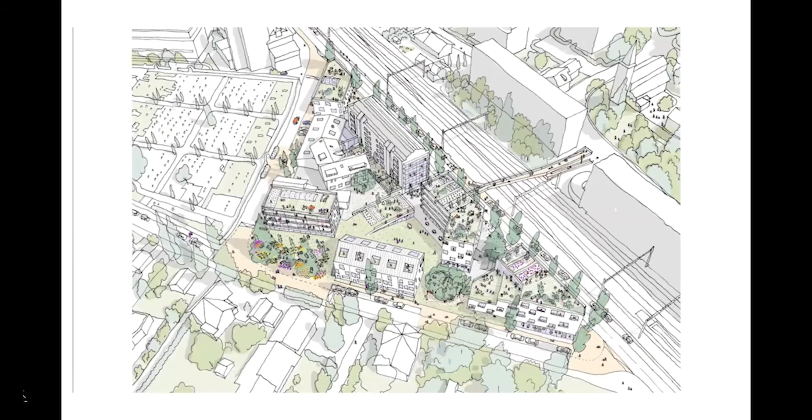Design United was created in March 2020 during a period of intense lockdown and quarantine measures within the region. The aim behind Design United was to create an optimistic space for regional dialogue, connections, collaborations, and opportunities for young regional designers and design practices—a much needed network of support and peer mentorship during these uncertain times. Talented young designers and design studios working on design innovation with an approach relevant to our South Asian region have been invited to be part of the platform.

With this background to Design United, let's move to the much anticipated presentation and conversation this evening. I'm Varna Shashidhar, founder principal of the regional landscape practice VSLA based in Bengaluru. I'm supported by my wonderful DU and VSLA team in this endeavor, along with Claywork Spaces. I'm delighted to welcome our inspiring presenting designers, architect Yanto Effendi from MODERNSPACE Jakarta, Indonesia, and architect Ajith Andagere from Magadi, India. Their presentation will be followed by a moderated discussion.

It's indeed a privilege to introduce our presenting designers. Yanto Effendi from MODERNSPACE Indonesia. Yanto's design philosophy focuses on the creation of modern architectural forms and spaces that are comfortable and livable. He believes that no two buildings can adopt the same design, as each project constitutes a specific response to its program and its site. He established MODERNSPACE, a multi-disciplinary, well-recognized architectural practice in Jakarta in 2002 with his partner, Hanny Lim. The firm's work spans a vast array of typologies, including residential, institutional, hospitality, offices, and retail environments. MODERNSPACE is well recognized in the region for its detailed material exploration, which they bring to every project that they undertake.

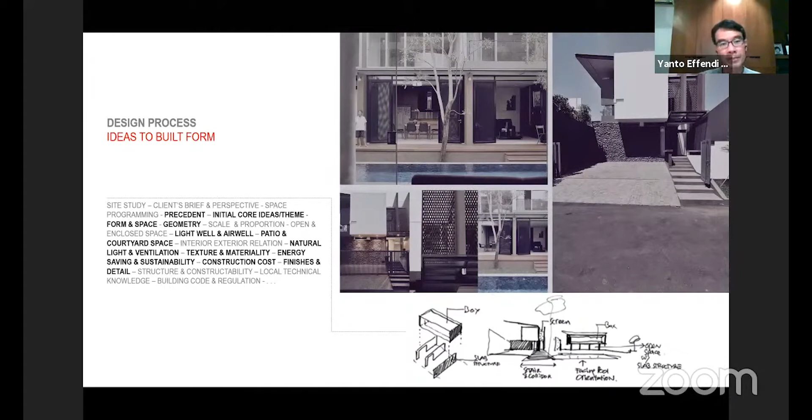Initial ideas, of course—on the first trial, the first time we get the appointment, we try to study the site, study what's the core problem of the site that we can resolve, and resolve it into a design language.

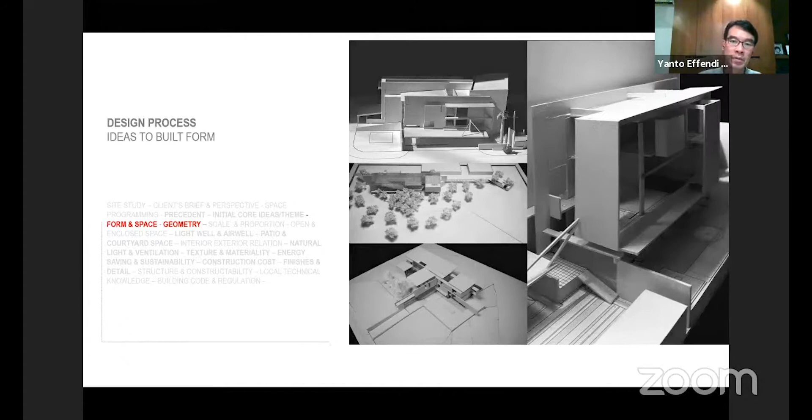We study the form and geometry through this process in our office—sometimes we do models just to study the forms. And then we do 3D studies also, from framework studies into basic renderings, just to see how the material, colors, and schemes work out together.

In each of our designs, we would love to have natural light and natural ventilation coming into all the sites. So every specific site that we receive, whether small or big, we always try to analyze the potential of the sun, natural sunlight, and natural air to come into our buildings.

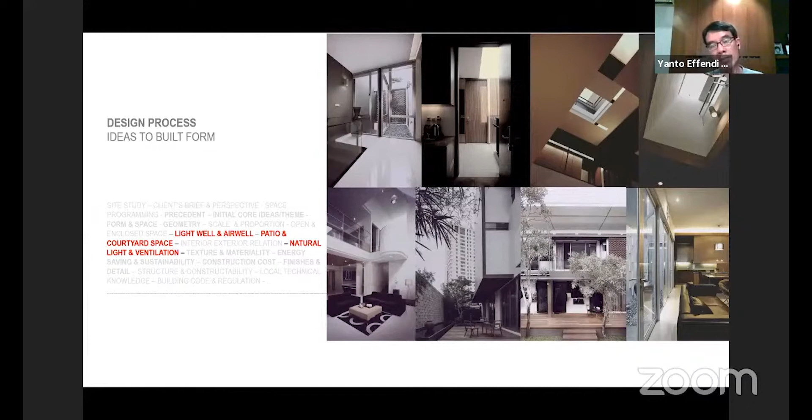When we try to do this, we know the effect is heat. So during this period, we would extensively study how, inside our space, to make the space a thermal comfort in order to get the most optimum light into the space, but also reduce the heat to prevent it and maintain thermal comfort inside our space.

The materiality we choose depends on the mood, depends on the program, depends on the specific mood we want to create in the space. The material and details themselves we create to solve each of the finishes that we have to collect into the space itself.

After the form and everything, the space is created. We also try to solve every detail of particular corners, particular joints, so that we have well thought out, precise details to solve every corner of the materials we use, so that everything works out well together by joining all the materials to create the space.

This is some material that we're using. We're using textures - smooth textures, rough textures - and then some of the character of the material itself to create the specific functions.

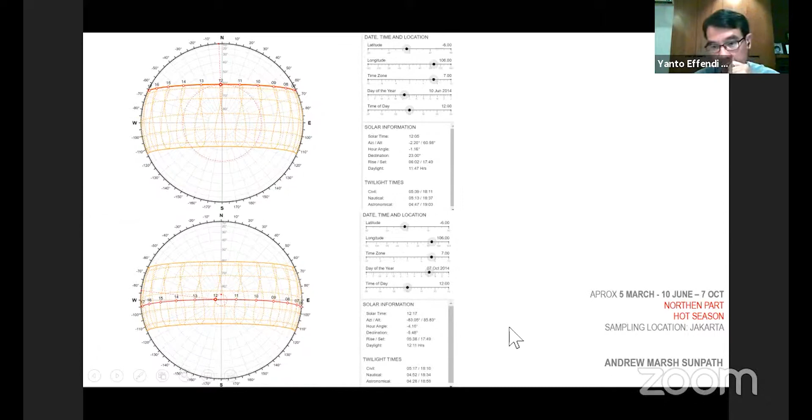Basically, most of our projects are in Indonesia. We like to use these schemes of sun path. In Indonesia particularly, we are in these regions, so the sun will be traveling from east to west, and during the one year time, the northern area will be lit up with a longer duration of sun, like a month longer than the southern area.

So the northern part will be hotter and longer during that period, and the southern part is happening during the rainy season. It starts shorter because the sun doesn't radiate as much due to the shading of the clouds during the rainy season.

So that's all the introduction of our brief projects that we're doing. I wanted to present 3 projects, which I felt are like a milestone for us to study specific use of materials and specific solving of problems.

Like in this house particularly, the project happened around 2012. So we have this kind of project where one area is facing west sun. During that west sun period, from 12 o'clock until 4 o'clock, there will be heat transferring into the space.

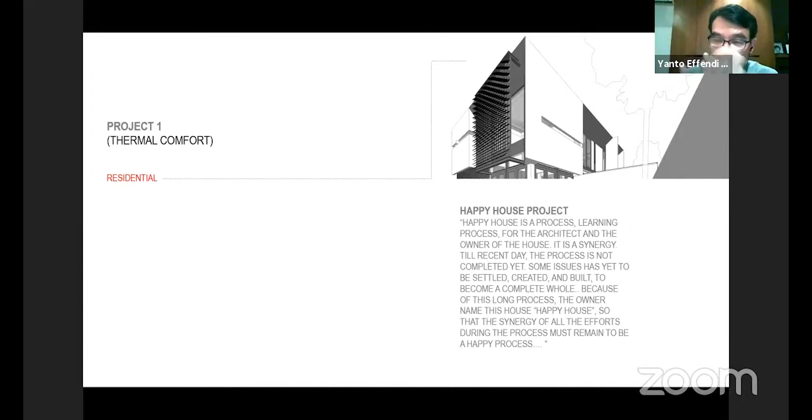This particular house is actually the one where we first tried to study how we can protect the glass that we want to open for view, so that this glass doesn't get heat from the sun. When it's not heated by the sun, hopefully the space inside will be cooler due to the protected materials. So we've done some analysis for this house.

So normally the massing that we're doing, we would like to break it into a smaller part, so that this smaller part can contribute when we open two sides, the air will flow quite okay. The character of the wind also depends on the openings, the big and small openings, and this affects the wind to create a wind tunnel and breeze inside the house. So with this big massing, we cut the area so it will be shorter, and hopefully the breeze will come in.

So we divide the private and public areas, and as a diagram we try to segregate them. These are the schematics we studied for the wind. This area is the west facing side, so we try to treat this area so it can protect the spaces behind from the heat.

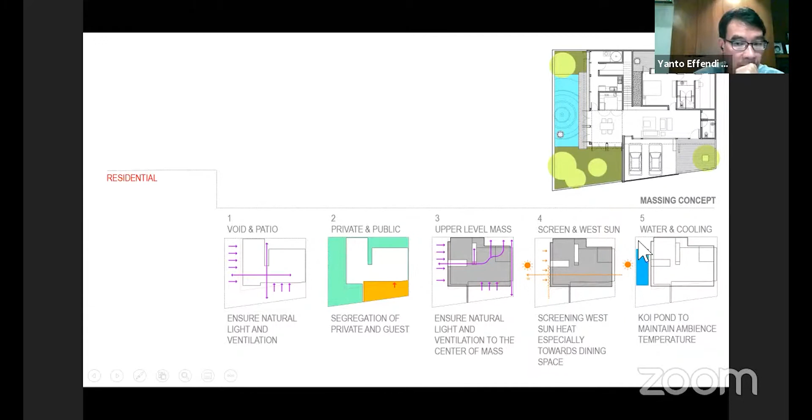So we do some sunscreens here, and since the owner has a hobby of keeping a fish pond, they wanted a koi pond, so we put it on the west side also, just to allow the air to evaporate from the pool itself to cool. It's like passive cooling for the space. When the breeze comes in, it can blow in the evaporated water vapor.

So in this particular house, we try to study the screen. Firstly, in our earlier design, we tried to use a screen made of timber. But when we went forward with the project, we felt the heaviness of the outdoor timber and the thickness required meant it wasn't bendable and was quite heavy. So we tried to find another alternative.

Then at one time I was looking at a pool chair using synthetic rattan weavings. When you sit on that chair during the day, you won't feel hot. So I was thinking maybe this kind of isolator material could be used to screen the heat, so it's not transferring the heat into the first layer.

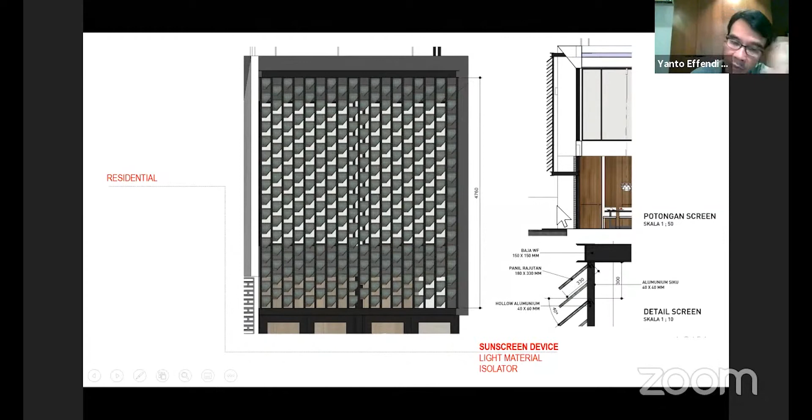So what we do is install the screen here, tilted at an angle that can protect against the hot sun until it reaches an angle where we allow the rays to come into the house, but by then the ray is no longer very hot.

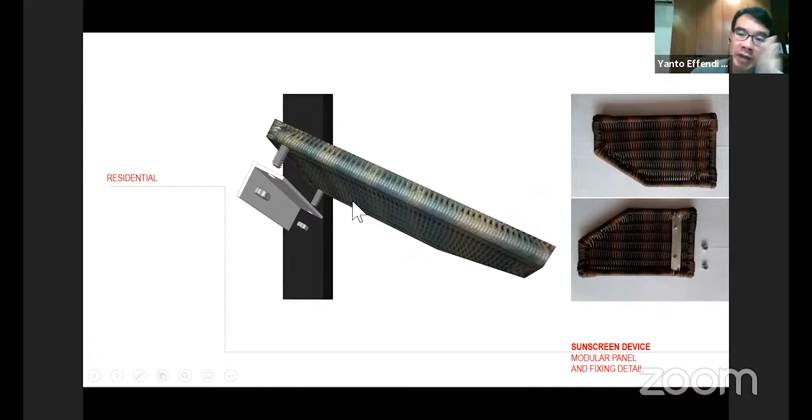So for this weaving material, we were helped by a local weaving specialist. We felt this material is an isolator, so it doesn't keep the heat inside. When the sun hits the material, it hopefully doesn't transfer or transmit any heat, and doesn't conduct heat through the walls and everything, so it doesn't reach the glass.

And it happened quite wonderfully, because before this was installed, the glass was very hot. But after the screen was installed, we touched the glass and it didn't feel hot anymore. So it's guaranteed that the space inside will also be cool.

So this is the mock-up. Sorry, can I go back? This is where we drew the mock-ups, helped by the specialist to build them, and then we installed them into the screens. So we can create any form with this kind of screen actually.

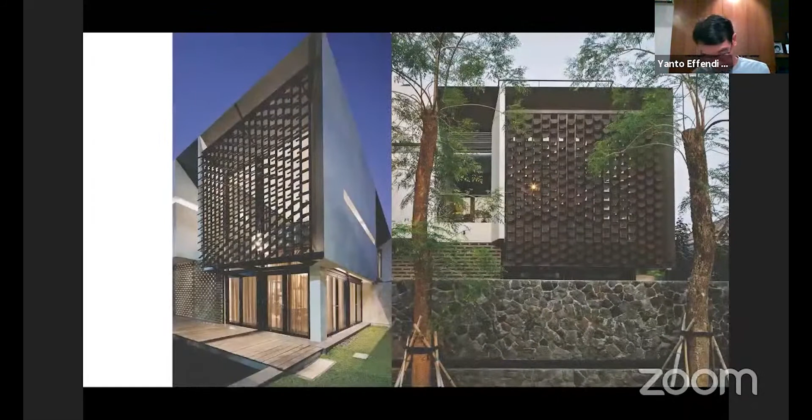So this is all the image of the house when it's finished. I'll just briefly run through the house. That's the dining area where everything is glazed, and all the facade is protected by the secondary skins of these weaving materials.

After this house, I wanted to present it because this house was like a stepping stone for us to create other projects after this, where we tried to perfect how the room temperature can be controlled by this kind of sun shading device.

This is actually a small house, at the second level of the house. The room temperature inside this house is quite well protected.

So after a year of completion, we came back to the house and saw that it was getting better and better, because people had already inhabited it, making it more lively. This is the space where we came back a year after to visit the owners, and we brought our team along to go around the house and enjoy what we did.

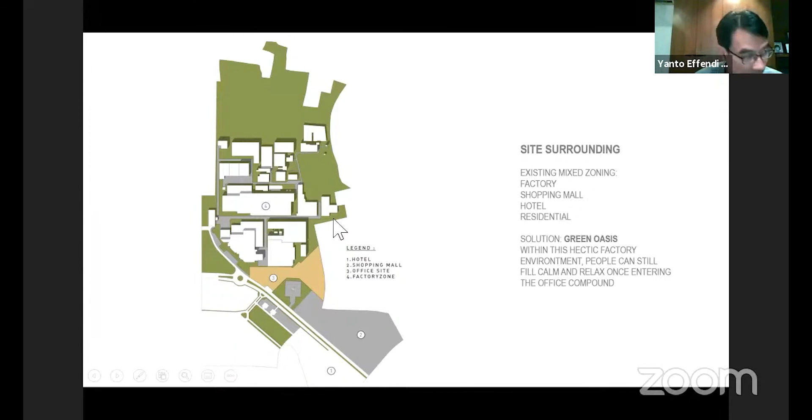So we have the lots like at this yellow area here. This lot is irregular plots. Here there's a helipad, here's a shopping mall, there's a hotel, and all these parts are the factory areas. So this is actually the factory of a headquarter office that produces smoking cigarette papers.

So here's the site, about 2.4 hectares. We try to divide the site into two areas. Here we allocate the space for the public car parks and motorbike parks. So here's the location, because of this irregular part we try to fit in the requirements of the parking facility.

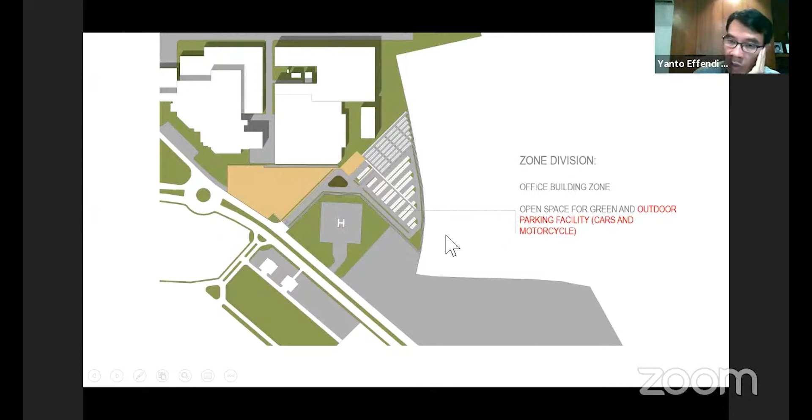And this area we try to put the main program office. The main office building is here, this is the receptions building. So the flow will be from this gate, we have to go all the way here until the reception area, check in, and then they can be distributed to the office and to the factory area.

So we would like to do some like a resort type of office where it is protected by a lot of green areas and a lot of trees, because over here we felt that now it's too dry and not as much tree as we have right now. So we would like to name it a green oasis for this particular project.

So we would be thinking to plant a lot of big trees and protect the sites also. Hopefully by the shade of the trees, also the ground area will be protected from the heat, and then the heat itself doesn't transfer and create a hotter microclimate around this area.

So after several years of practice after that particular house, we try to intensify our study to resolve the heat problems. Okay, we try to study how the heat reacts to the certain microclimate that we create.

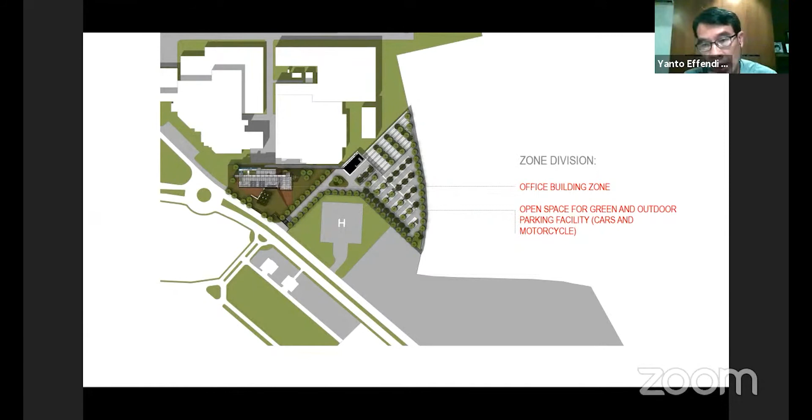When we do some architecture on the site, we will definitely change the microclimate and the surroundings of that area. So in order to enhance that, we will try to equalize the area so that it doesn't get hotter. What we do is we try to protect the hardscape with the trees, and we would like to also plant a lot of gardens in the area just to absorb the heat into the ground.

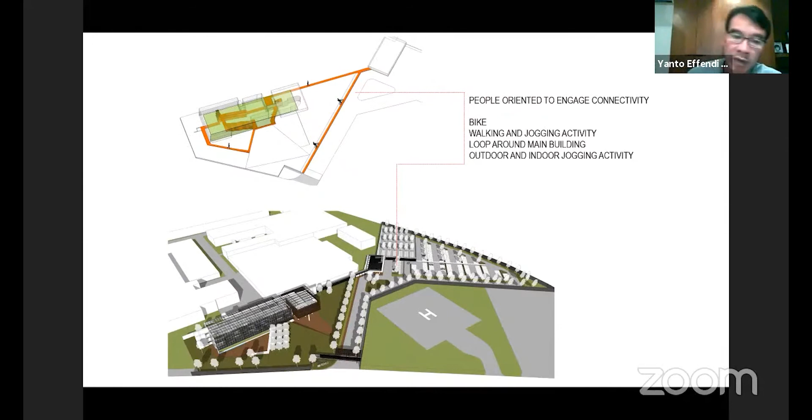So this is the perspective aerial view. There's actually more concept on the programming conceptual, but I didn't have time to really elaborate this functional area. What I'm trying to elaborate here is the way we first studied further how to protect and surround the heat, to protect the buildings and to create the passive cooling and thermal comfort for these buildings.

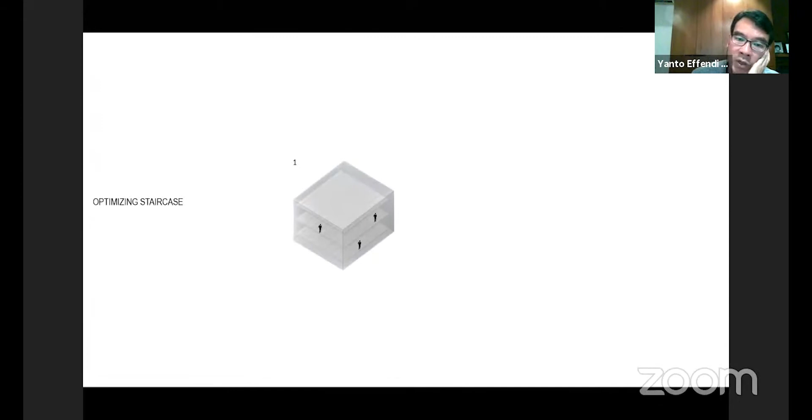And then also it is pertaining to the programs also, for they wanted to have intense collaborations now. Each of the departments should meet each other in every place, they can start to have a dialogue and have a conversation, so that the creative moment will happen hopefully after we open up the office and they can blend with each other, bump into each other in the staircase area, in the public area. Then they can sit at that provided space, whether interior or exterior, they can talk, and hopefully they will generate some new ideas and a collaborative way of thinking.

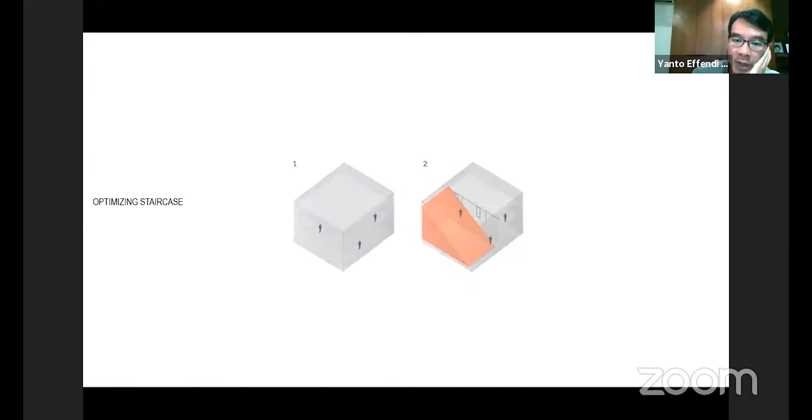So the orange part here, we try to create quite a big staircase area to connect all these floors, and this staircase area we can utilize it for functions. First, we can utilize it for functions like an amphitheater. Below here, we can use it for the meeting area. The lower part, we can collaborate with the space over here to create what we call an infill area that can function multi-purposely.

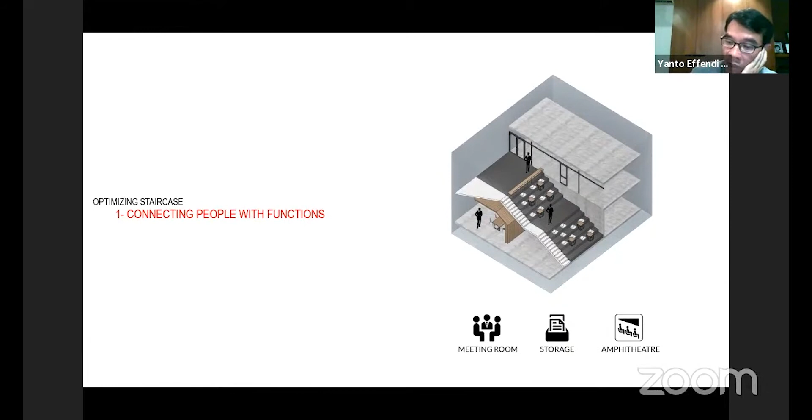Here is a brief to elaborate this area. So below these stairs, it's like a section of these stairs, and we try to create this diagram where we can have storage, and then when we drag and pull it, we can have a storage area, and then we can have the working space, an additional working space for when they want to have a moment to read books, like a small library and working space.

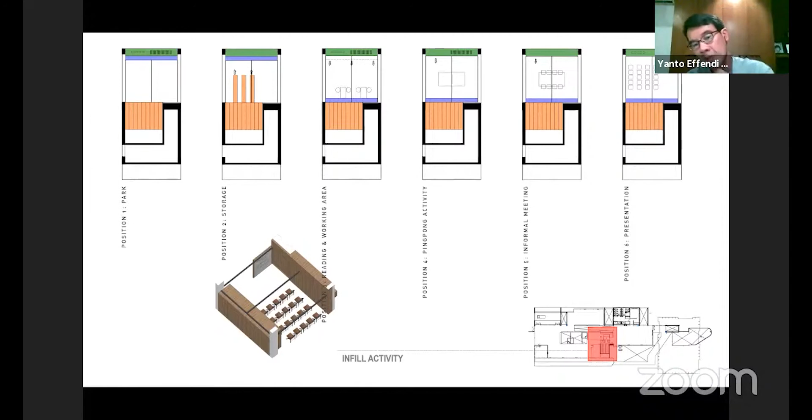We can drag this cabinet out and have another zone of space here, and they can use it for sports also. We have a ping pong tennis table that can also act as a meeting area. And then some more, we have storage to keep these chairs. When they want to have briefings or small seminars, they can use this space too. So it acts like a multi-purpose usage for this particular space.

So this is the way we move the furniture later. And then some more, we have this staircase also act as a patio or a buffer space for heat. So the concept is the main building is protected by this space gap that can protect the main building from the heat. So this one is an outdoor area, this one will be an indoor area.

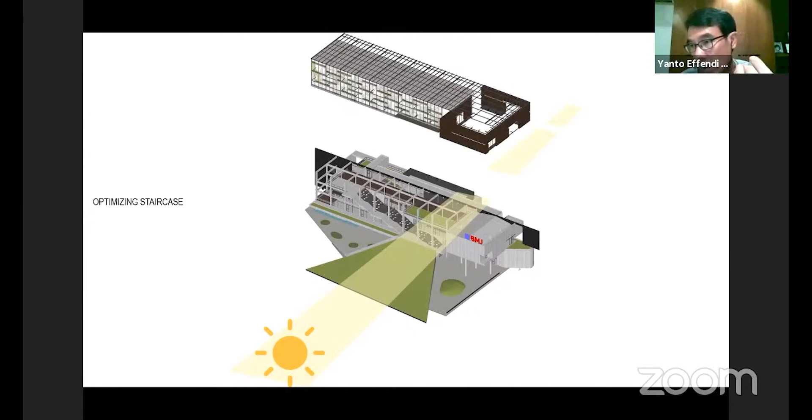So at this particular staircase, we try to protect this area also with a screen. But for these screens, we're trying to explore doing some screens with green planters, so that hopefully when the plants climb up the screen, it can screen up the staircase behind it, so that the air quality improves, and during the morning time they can spread out more oxygen. Then the breeze also can be quite refreshing for the staircase zone area there.

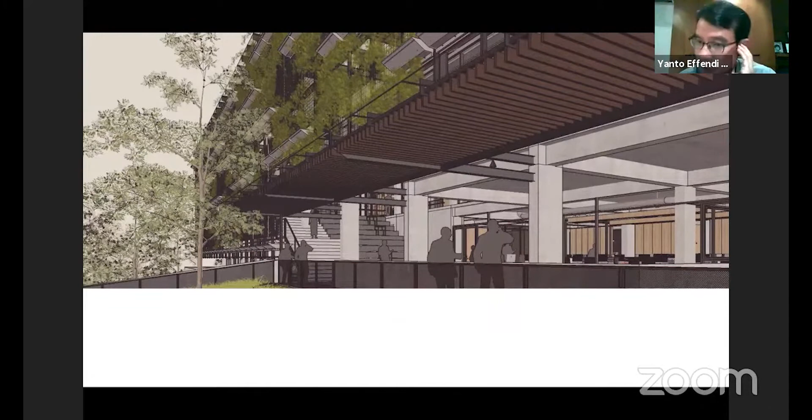So this is the study of the 3Ds. Hopefully when these screens are already full of plants, they can also act as a view from the office. Every window can see the greens from all over the working space. So this one is the concept of the screens.

We try to do something, customizing the details of the pots. This is too small. So we try to custom the pots with custom fiberglass, with all the system of watering and everything, and we place it randomly into the structural skin, and then we put a wire mesh, and then we put the plants, and hopefully the plants will someday cover up all the screens here.

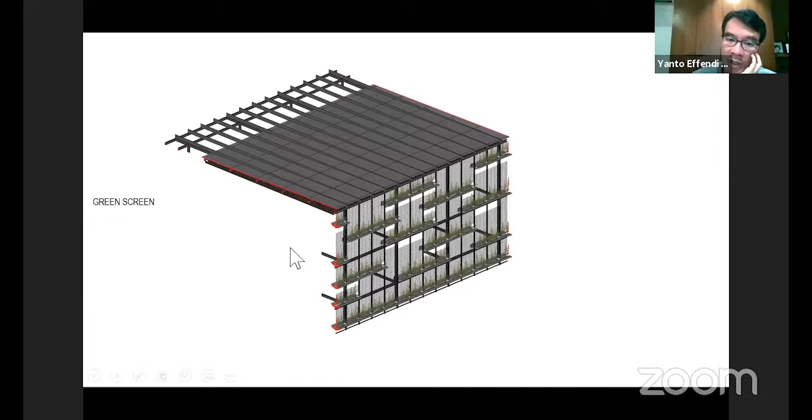And when it's covered up with the full green area, the room temperature behind that green space hopefully can reduce the temperatures and create a comfortable microclimate behind the staircase area there.

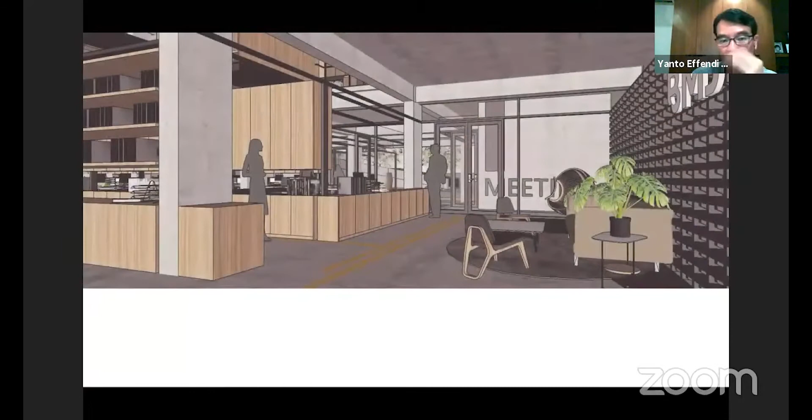So what we try to do here is at every corner of the space, we would like each of the stations where people are working to see the water, to see the greens. So it's like a biophilic feeling of space. This one is like a corner that can face the staircase area where later on, when this green screen has filled up, they can enjoy the greenery also.

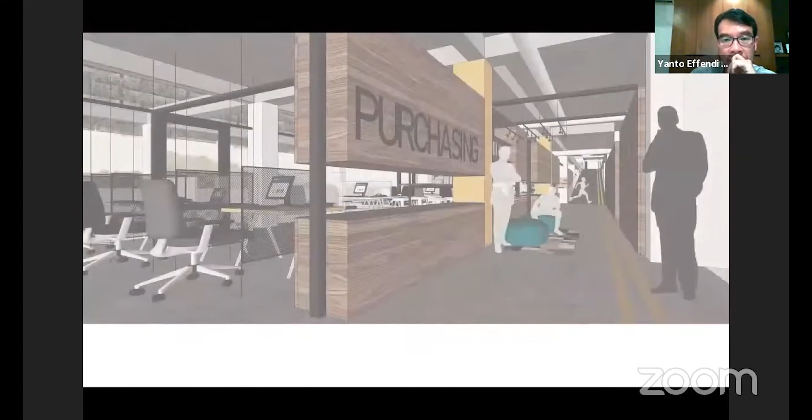This one's with some of the interior parts, interior space. This one is actually the meeting area below the stairs that we try to use up and optimize all the space. And the lower part here is the area where previously we've done the multi-purpose combinations of space. So over here we create a space like a melting pot, so that everybody when they pass, they see this kind of space, they can sit, they can bump into each other, and they can discuss something over this area of space that we have created, and they can see the greens also.

This was the meeting rooms, behind and below this big staircase.

The play within the voids, the double volumes, and because it is an open office, we try to also provide some of the spaces where they can have quiet moments. So we create this kind of pods. So when there's a need for some people to work more privately, in a more alone space, they can use this space to work.

And we put some of them on the voids, on a double height area. Here, they can act as a bridge. They can see what happens below, and then what happens at the staircase area, and then they can see the green all around the sides.

This is all the melting pots there, besides the normal working desks that we provide in the open office, where they have this kind of melting pot areas also, where the coffee machine will be put. They can get coffee, and then they can just have a small discussion here.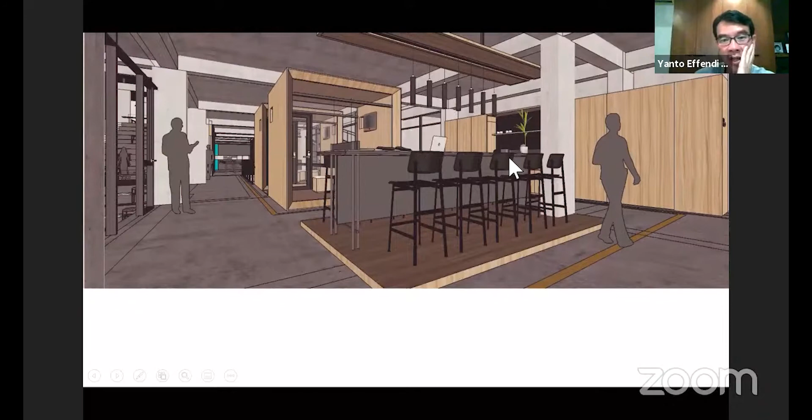This is the impressions of the interiors of the working space. Here we have ramps also that climb up, connecting all the floors up to the roof area.

A big meeting area. So this is the impression that we wanted to have. This at the entrance area where we are welcomed by the small portions of the landscape.

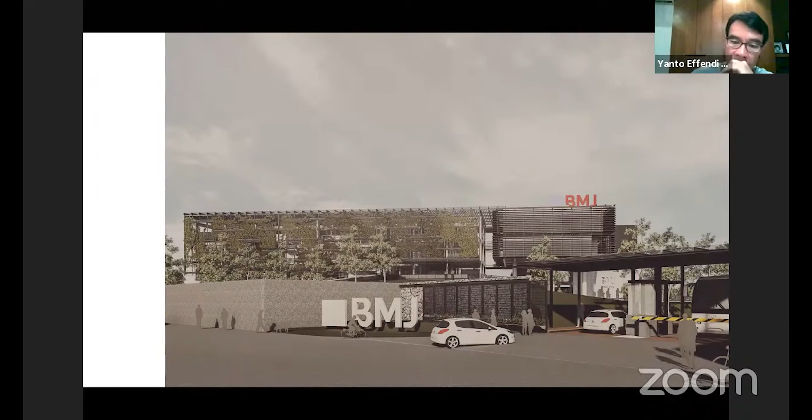The gates open during the day and will be closed. This is the entry points, all the corridors towards the reception building, and this is all the greens that we want to achieve later. We would prefer that this building later will be covered by trees and not as bare as this, so that when we go inside, all we see is greens and trees and the shaded area by the landscape.

So this one we took out some of the trees actually for the purpose of the 3Ds to see the buildings, but we were hoping that later on this area will be covered up all with repetitions of trees.

So this building now is under construction. As you see here are some of the mock-ups that we're doing. This is the green pottery that we try to stick into the screens for the creepers to grow.

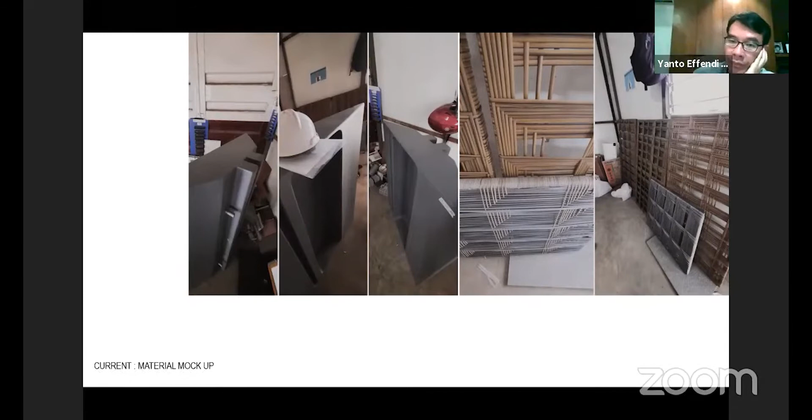So this is like 2 weeks ago photo when we went to visit the site. Hopefully this December the building itself can be finished and we can continue to the interior parts, and hopefully next year we can also already see the buildings done.

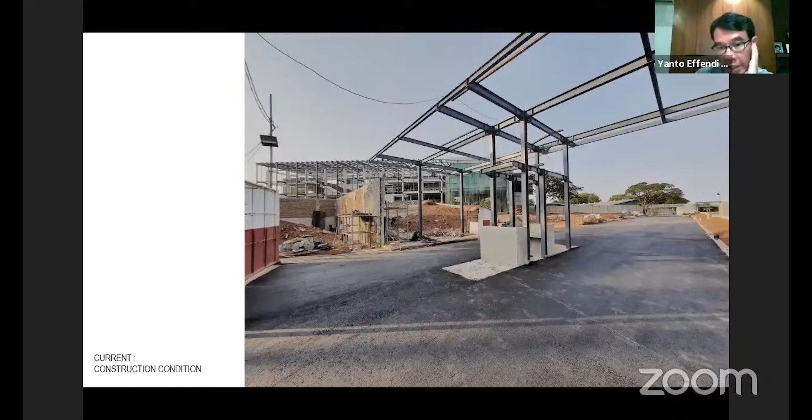This is some of the site photos that I took like 2 weeks ago. So this is the framework of the green screens that we're trying to create, and this is all the staircases where connects all the floor areas, each of the floor area. This building is like four stories. At the top here is the roof area where the greens and roof decks is an open roof decks area.

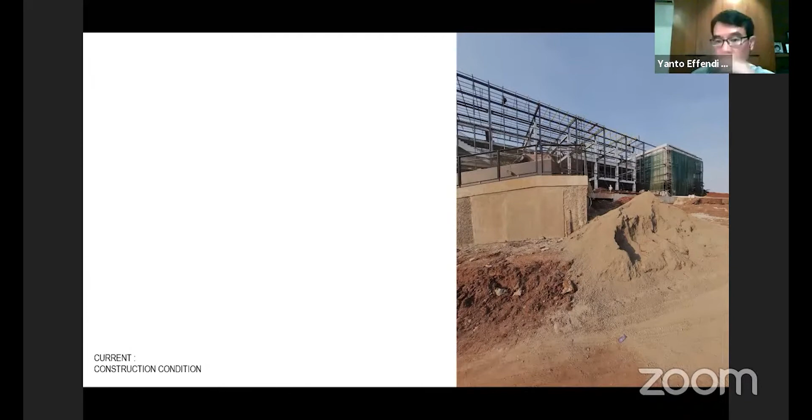This mass here is actually a multi-purpose hall, and below is the gallery. They want the gallery for them to exhibit their old machinery, factory machinery. They would like to put it there and have a little gallery to welcome the guests that come to the office.

So this is all the ramps that connect. We have all the circulations that can connect all the surroundings of the buildings, and we can go fluidly through the buildings, go from outside inside, and then go to the staircase.

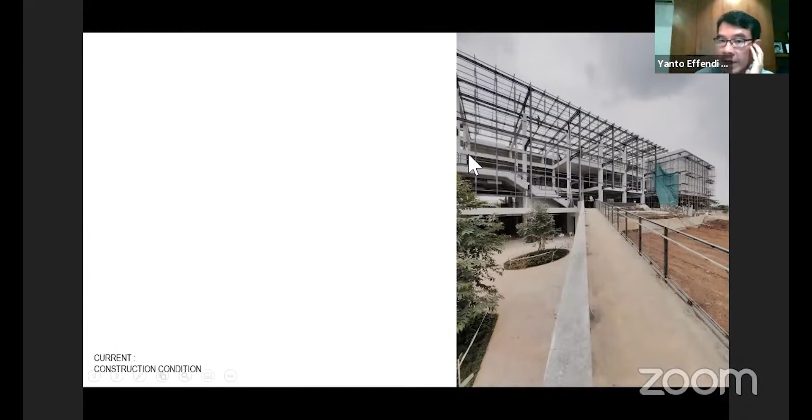So we grow the trees from small, nurturing the trees from small. Now it's quite high already. It's been planted for around 6 months. Hopefully in another 6 months it can grow taller. We're using eucalyptus trees here.

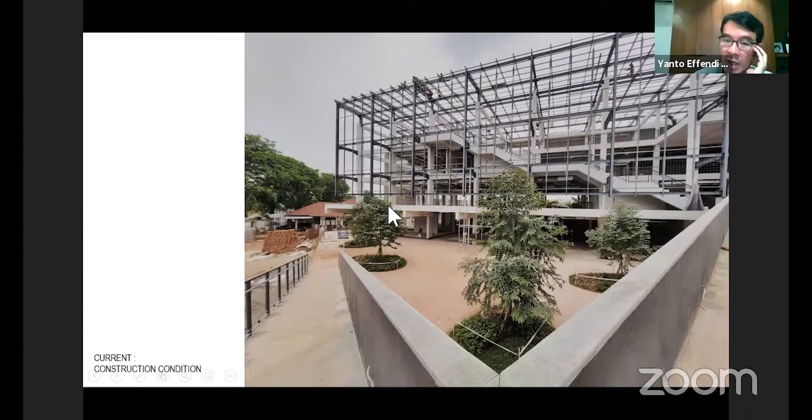This is the main structure where later these steels, we try to put a fiber pot over there just to grow the trees. Below here is also a green area, later for the roof garden. All the roof gardens are meant to protect the concrete itself from the heat, so that hopefully by all these means the room temperature behind this space that we've created can create a better cooling system and cool microclimate inside this area.

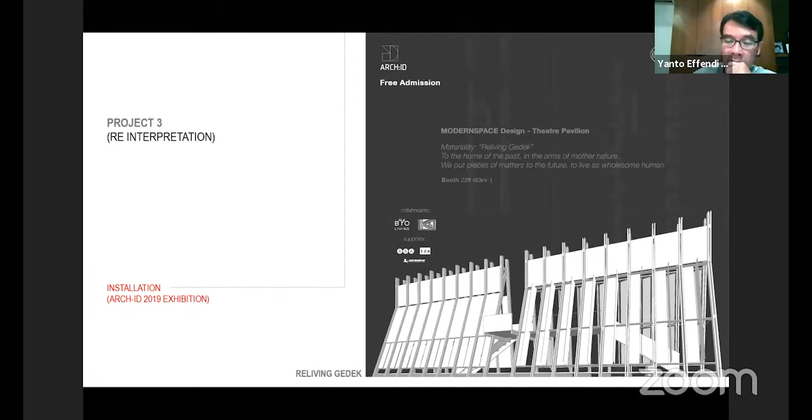Okay, the third project we would like to show is from early this year. We were invited to collaborate with material suppliers to create an installation. It happened this January. Right after that, we held an exhibition for 3 days, then we were all shut down by COVID. So luckily we had the chance to exhibit it already.

For these installations, because we are eager to study the way buildings can operate within this tropical environment that we have, it's wiser for us to study from the vernacular buildings, the adaptive old vernacular buildings, how they construct, how these kinds of houses before could stand towards the weather, the humidity, the sun, the heat, and the ventilation.

So all these things we try to extract. Basically, it's a simple house. They built the house with timber constructions, using local timbers from the nearby area, because during that old time they didn't have enough transportation, so what they could use is just the material surrounding the nearest environment. So what they could get is coconut wood, teak wood, or sometimes bamboo. This kind of material is the main structure of their buildings.

And the wall itself, they create weavings of sliced bamboo, so they can create perforated walls. This kind of wall interests me to create this kind of installation.

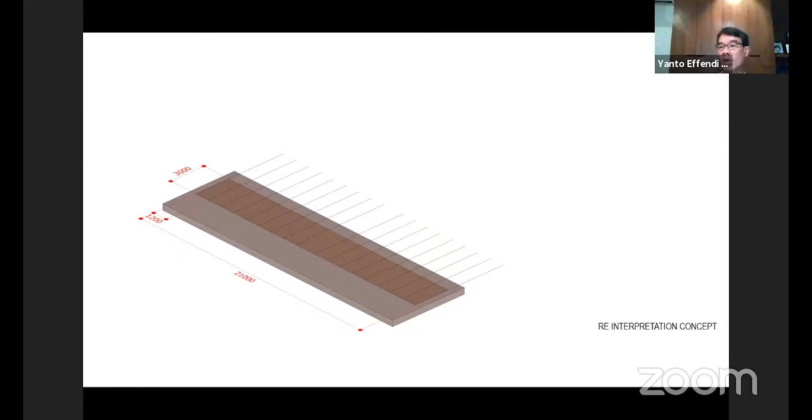So what we take is we try to divide the grid modules based on the material. Here we only use two materials, timber structures for the main frameworks, and we use the plywood system. The plywood is cut to become a plank, then we arrange this plank to become the structural element, a rigid structural element, within that grid area. The module itself is derived from the plywood module of 1.2 by 2.4.

So we cut the modules also so that it has minimum waste, because the size of the plank itself is another grid of 1.2 meters. Here's some kind of stacking of the modularity for the slabs, the structure connection for all this, and then this

imitates the structures of the old vernacular house. At that old house, they used solid timber from coconut, teak, or bamboo. Here we use plywood, recycled, that can be renewed, and then cut it into a plank. This kind of plank acts as rigid structures, the triangle structures.

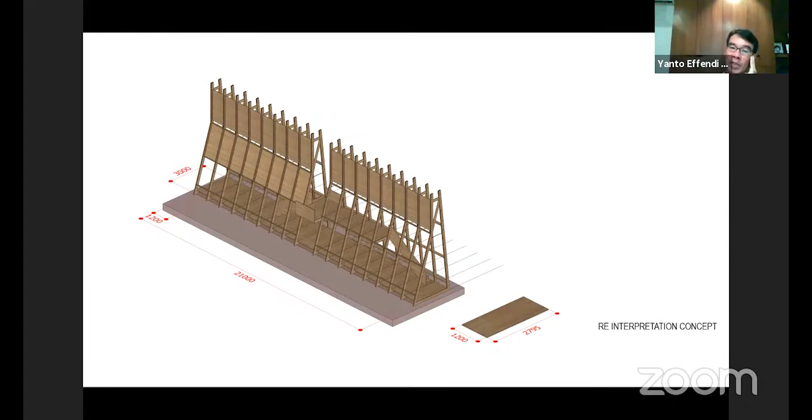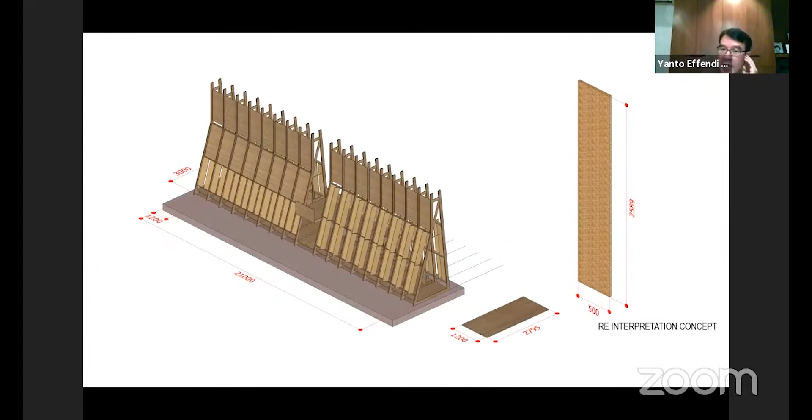We covered some parts with another plywood acting as a wall, and we study also the paneling. We try to study a simple weaving from the bamboo. They call the old weaving gedek. So we try to restudy the gedek weaving into a new interpretation. This is the model that we're trying to come up with.

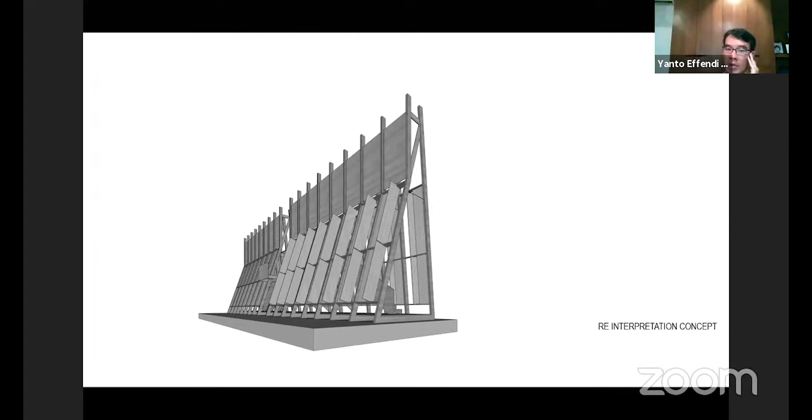We try to create a circulation area that can pass through, and they have another double story floor, so people can climb up to the second floor and then go down again here. And this going-down staircase can also act as an amphitheater for watching some of the process of how this building is created.

Okay, we have some video here to show. This is how we collaborate with the timber specialist and the weaving specialist to create this installation. We're using plywoods as structures.

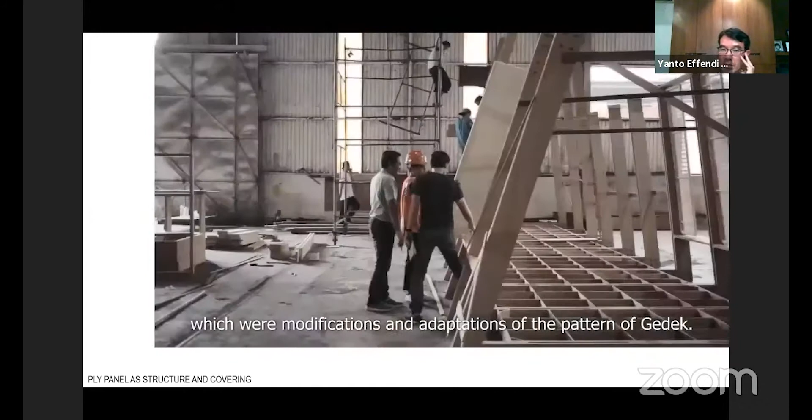Here we're using not synthetic, we're using real rattans for the screens. It's prefab, created in a factory, then we install it very fast on site.

This is our exercise, just to add to our knowledge as another way of constructing buildings based on vernacular studies.

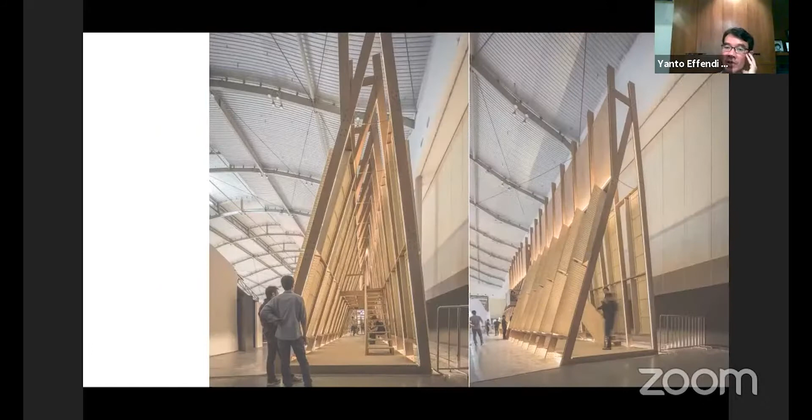So this is the result of the exhibition. We collaborate also with lighting designers just to light up the space of these installations. This is the space inside and outside. It's too bad we didn't try this installation outdoors, because I would really love to see this installation in an outdoor area where the sun casts into the space and how the shadows are created in this area.

This is the details, and it's been installed here for only 3 days. After that, the exhibition is only for 3 days. Too bad, we cannot enjoy this space longer.

So the floors also we raised. Actually this kind of method is what we extract from what we learned from the wisdom of the vernacular house. They raised the floors also just to throw all the humidity below the ground, so that the floor is detached from the ground, so the floor will not be as humid as when we really stack it into the floor, because in Jakarta or in Indonesia, some of the area is quite humid.

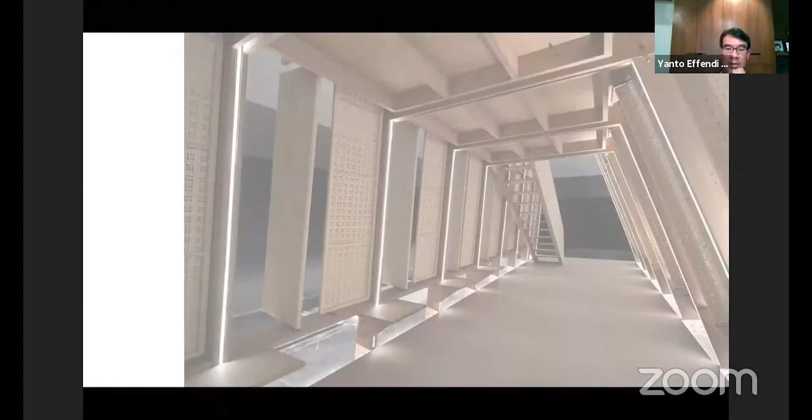This is the space inside. Okay, I think that's my 3 projects presentation. Hopefully it doesn't take too much time from my presentation.

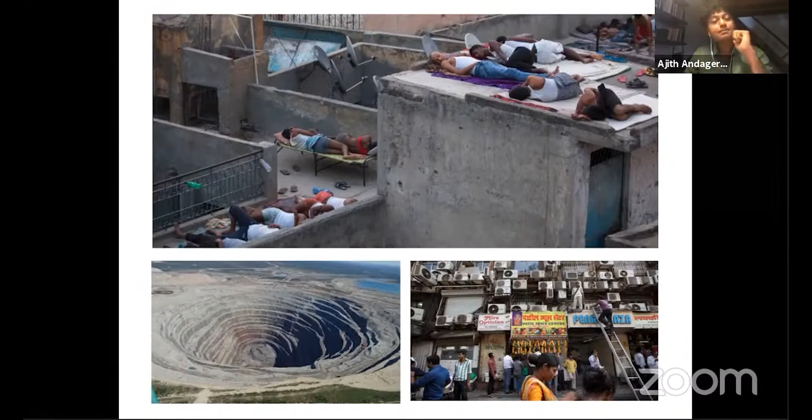This picture speaks to the current situation. So here I'm going to briefly talk about sustainability - what is the meaning of sustainability? Not just in architecture, even in our life, how we can minimize the impact on Mother Earth or on the planet.

Why? Because they built for the context from the local available material. Based on the context and the local available material, the craft developed. For example, in Rajasthan you don't get much wood, so they built differently, and also the temperature goes up to 45 degrees in summer and comes down in the evening. So how did they tackle this without any technology or electricity?

This is an amazing observation we all see around us in our country - every 50 or 100 kilometers you travel, the style of architecture kind of changes.

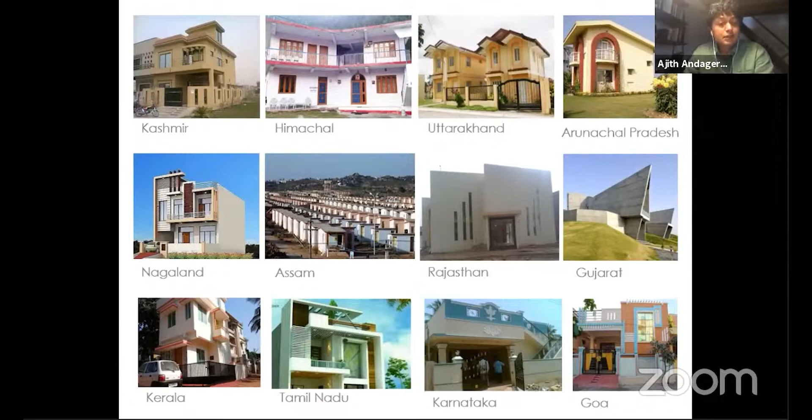Coming to our story - through our practice and team, how we are addressing this issue on a project basis or daily basis. We believe that for an architect, it's not just what we produce or our expression that's important. The way we live, the environment we create around us, also plays a very important role in our practice and in our life. That's the journey so far.

Our approach to life and architecture are kind of related to each other, and simplicity and minimalism - we believe in less is more. So whatever is really necessary, we kind of take it up. That reflects on our projects as well, where we try to minimize the number of materials which go into a building. Of course it's not easy in today's world to get so minimal, because you get tempted all around us on a daily basis. But we are trying our best to minimize the usage of material and spaces.

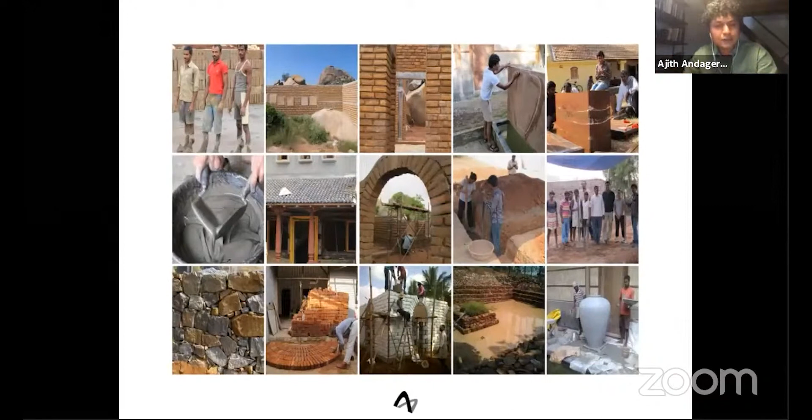This is some of the images from our on-site projects in various stages.

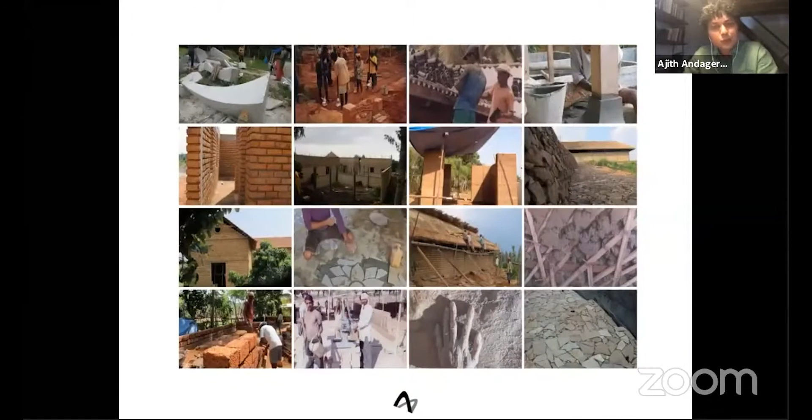The picture speaks. I'm going to show a lot of photographs in this half an hour. And also we build models, like the old school method. In each project we'll have a study model while designing.

Once the design gets frozen, we build a wooden model, a pretty detailed one, and we keep it on site - in most projects we try to keep it on site, though sometimes we're not able to. So the team gets to see how the building looks like. In today's practice, many of the masons or carpenters may not have the entire picture of the building - they're just given a particular task to do. But here they also feel proud. We wanted to engage them into the whole process of the building, so they at least feel proud about what they're building. Even if their involvement is just a month or two in the project, they'll feel proud about what they're building.

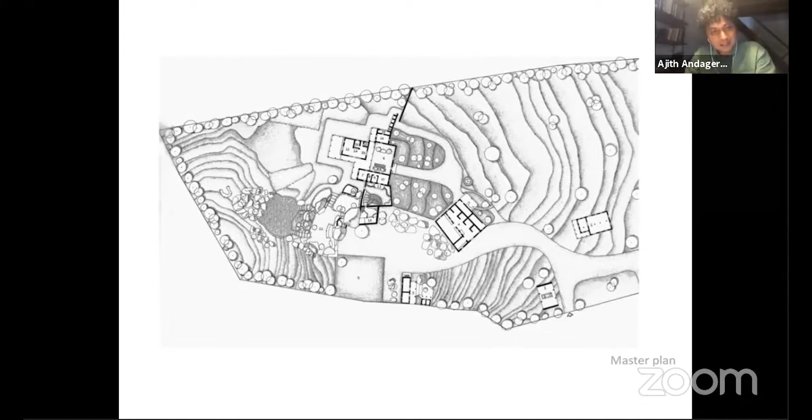So yeah, this is a farmhouse, 2-bedroom. The area is quite dry and arid, surrounded with a lot of boulders. In summer, the temperature can go up to 35 to 45. So we spent a lot of time working on various options. Even our first option was to bury the entire house, because the nature around is so powerful, and we didn't want to go head on with it. But the client asked us not to bury the house because he couldn't really relate to the space - he'd never seen something like that. So we had to build above.

So we decided - he had a lot of waste granite. On the left bottom picture, you can see that's like a waste slab, which becomes a foundation. We buried this in the ground wherever the walls were, and above that we started building the wall. The wall is made with sun-dried adobe bricks, not machine-made - a very age-old method using a wood or metal mold, mixing earth, clay, sand, and lime. For the external wall, we used 6 to 8% cement as a stabilizer. We used predominantly coconut timber for the roof of this project.

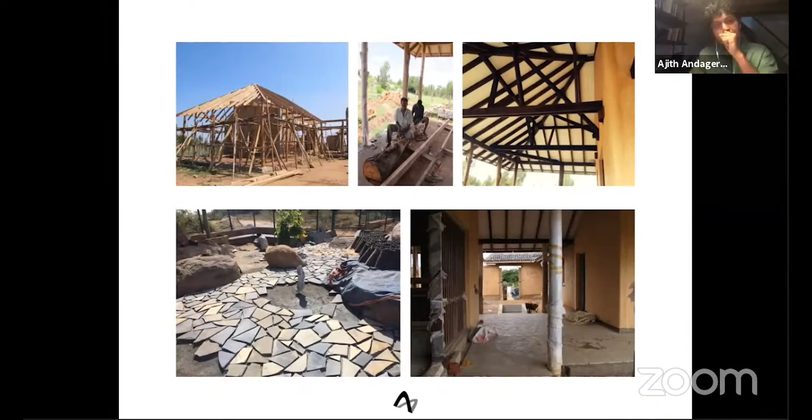This is the finished image of the courtyard. In North Karnataka, and even South Karnataka, a common feature in vernacular houses is the courtyard - sometimes you have a main door and feel like you're entering the house, but actually you're entering a courtyard first. So there's a transition of space before you really enter the house. We've taken that essence of village houses and tried to adopt it in our new projects.

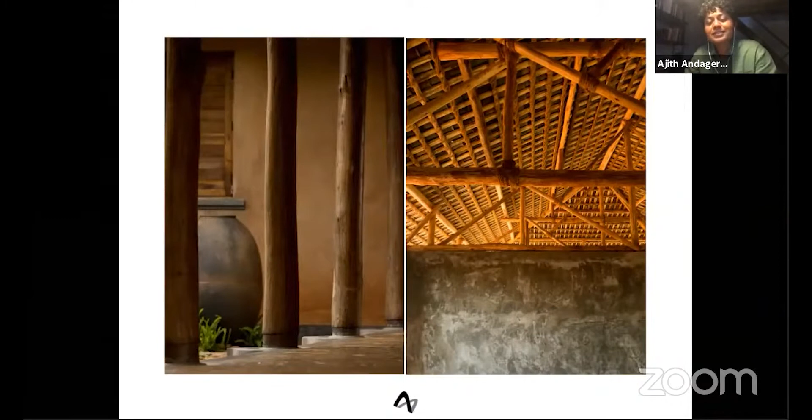On the right side is the cow shed, with a roof made completely in a different, local technique—without using any sawn timber or rafters. In the main house we use sawn timber as rafters, but here everything is circular poles—kambas, which is eucalyptus, nilgiri, and casuarina—tied with coir rope and areca nut. People have forgotten how to build this kind of roof. Even villagers from the surrounding areas came and were happy to see someone building it, since this skill is still alive. For us it was an exercise to see if we could build a similar roof to our shape and size.

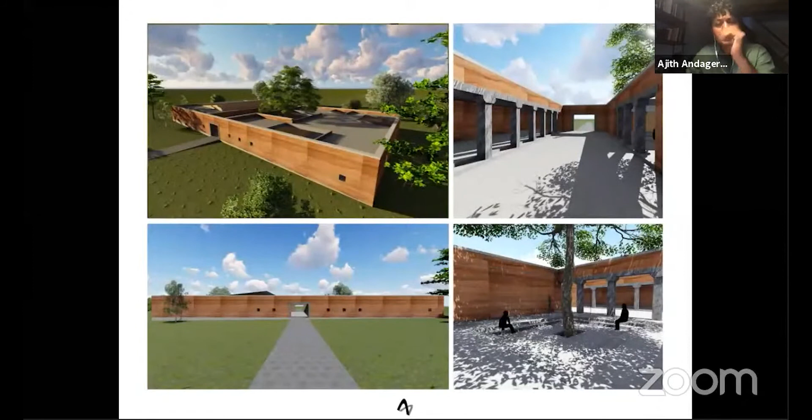That's a 3D rendering. We thought, let's build from what's available on site and keep it as minimal as possible. So we came up with a rammed earth technique for the walls, which doesn't need a lot of masons—just one head mason who knows the formwork and plumb line, and the rest is a workforce with shoulder power. It was also a way to showcase to the local villages that this is a different technique, not a local one.

And the granite—Bangalore is granite country, so not very far from here was a granite quarry. Since this is a public building that can afford to use this material, we wanted to use it because it will last for 300 to 400 years.

Initially, the government didn't know what rammed earth was. So we had to do a lot of samples to understand it, come up with a costing, and showcase how the wall would look. Even the local MLA and other bureaucrats got convinced, and we decided to build.

The external envelope wall is 1.5 foot thick, a load-bearing structure. Internally, we used a frame structure with concrete pillars, and the partition walls are made with sun-dried adobe walls.

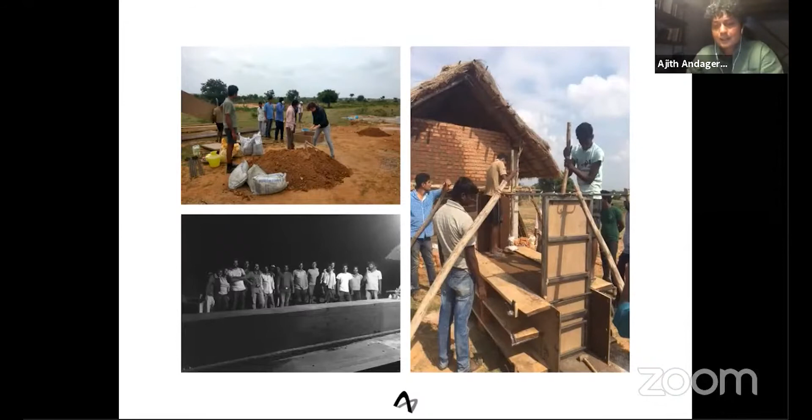That's the other shot, you can see the formwork we developed after seeing many examples from around the world. We came up with a very simple technique, a solution which works for us. We went for manual ramming instead of pneumatic ramming, because we wanted to showcase how our hand power can create such a thick and strong wall.

For the roof, we went ahead with a filler slab to create a void on the bottom side of the roof, which also acts as thermal insulation. Our original idea was to make it a green roof by growing aloe vera on top, since in future we wanted to harvest aloe vera for the lime plaster. Also, aloe vera doesn't require a lot of water, it grows from the moisture it attracts.

Next, that's some of the images at the time of construction.

Just to give you a size of the building, it's about 16,000 square foot, with an auditorium and a few courtyards.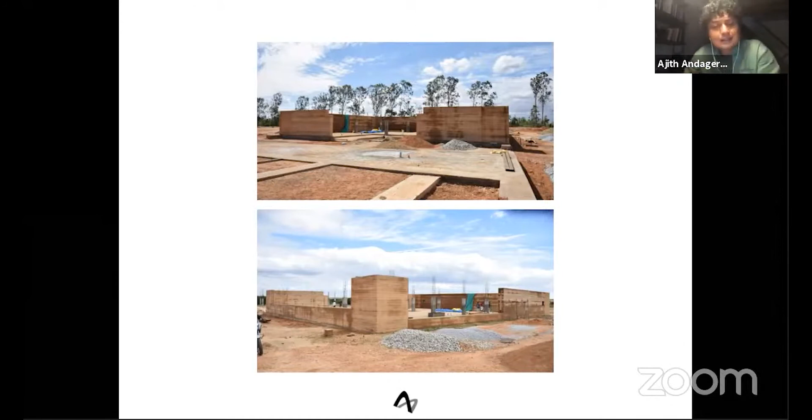These are some on-site pictures at the time of construction.

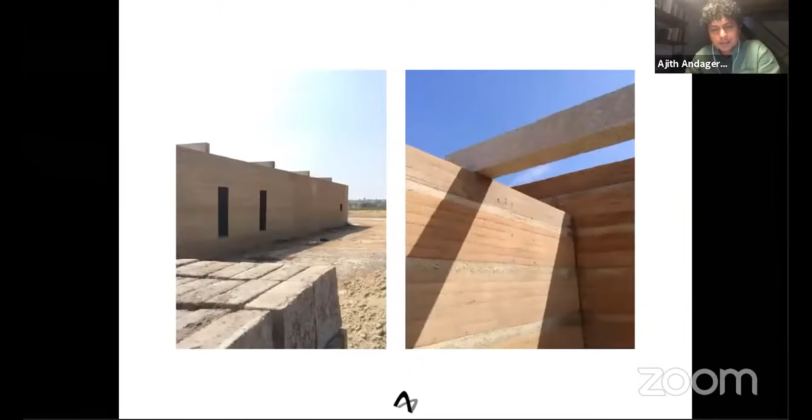This is the front facade, where we carefully worked out to hide the window, the lintel, and even the roof beam, so it appears seamless rammed earth that doesn't require any paint or plaster. We even oiled the wall to avoid it acting as a glue, since kids come and touch the wall and we don't want that, especially until it's set — because we added lime, it takes a little longer to harden.

I've visited a few buildings in Asia where rammed earth structures, 600 years old and five stories tall, were built without any of those modern binders, which is absolutely fine. That inspired me to use this technique without any hesitation.

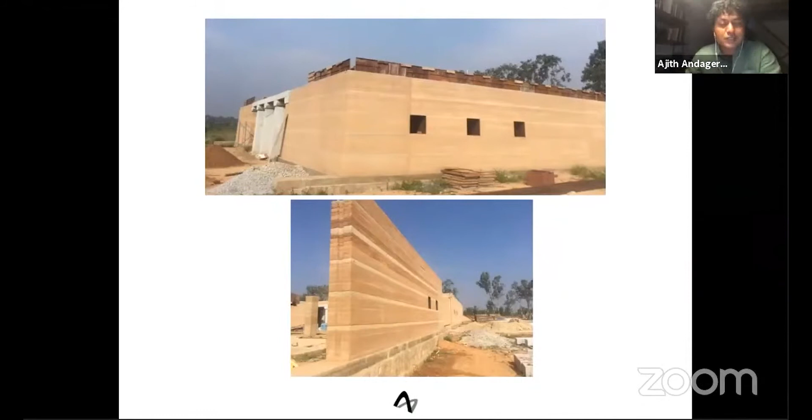Moving to the next project, a hospitality project in Andaman Island, in the far east of India in the Bay of Bengal. Locally there was no architectural history per se, because the people staying there are settlers from the last 50 or 60 years after independence, and the Andamanese tribes never used to build permanent structures. So there was nothing to hang onto as inspiration.

The client, a European client, wanted to build a 7-bedroom boutique villa on a 1-acre plot. His brief was to create contemporary Indian architecture. But unfortunately, we couldn't get all the material from the island, so we had to ship some modern materials from mainland India.

That's the building you can see on the site. It's an areca nut, or supari, plantation touching the rainforest.

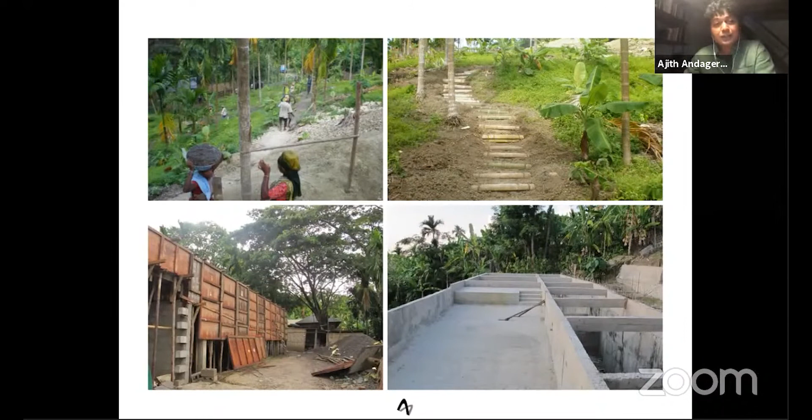But in return, we said let's use the craftsmen, and other materials like wood and bamboo and natural stone to create this space.

The stone also had to be shipped from the mainland, since there's no stone available in Andaman. Our involvement was design, build and complete, while the client was staying in UK. So we managed this project from Magadi or from Bangalore.

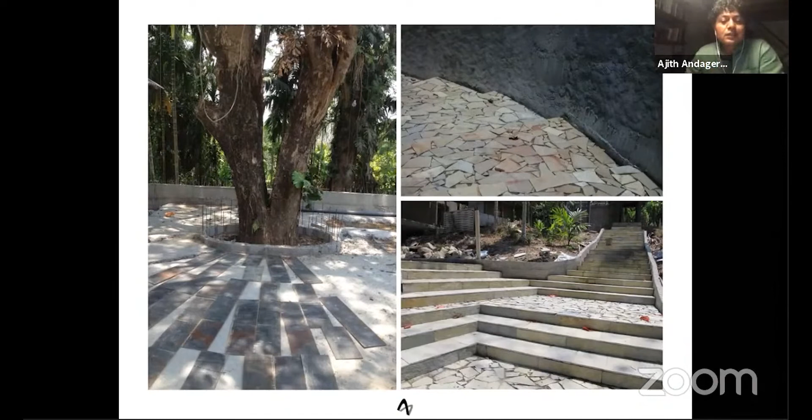This is the entry into Jalakara, the property, where it's quite green. It's tropical, beautiful to spend a few days as a tourist or for anyone who lives there.

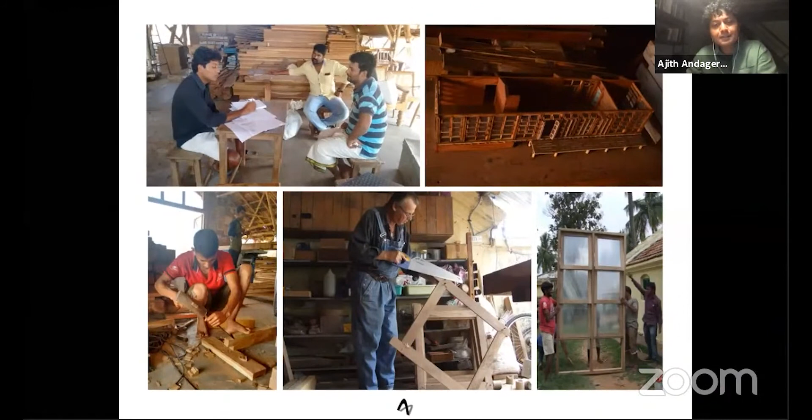This is the prefab, the next structure I'm going to show. This is an outhouse, an extra bedroom we built for the client to entertain his guests. This is our workshop where we built the entire structure, and there was a bit of a challenge I took on with my client.

He's a lover of Bali and Indonesian architecture, and had almost ordered a wooden house from Indonesia. When I found out, I told him, why don't you give our carpenters an opportunity? Why go to Canada or Indonesia to buy wooden houses when we have our own carpenters who can do it? He really encouraged us to do this.

Structurally, we worked the lighting with very minimal LED lighting, which gives indirect light, so it was a good exercise for us to work like this. The roofs are coconut timber again, and the floorboards are hardwood treated, again from Karnataka.

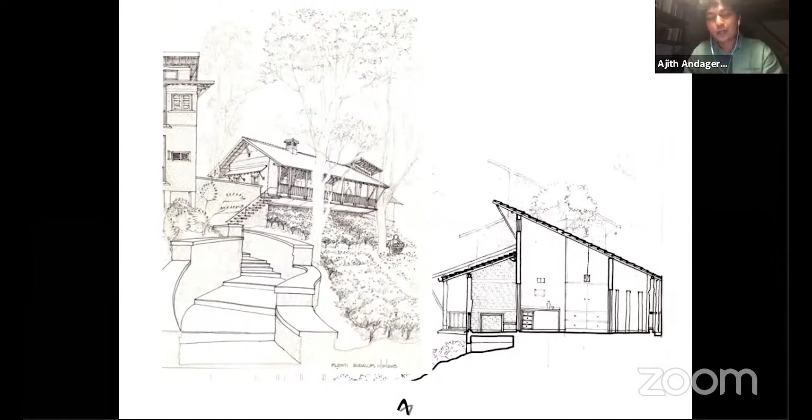This is the sketch of the house, showing how we built it on the slope. In winter the temperature gets down to 8 degrees, so it gets really cold for an Indian standard. We had to study how people used to build, the kind of wall thickness, and what kind of window openings toward the south, north, and east.

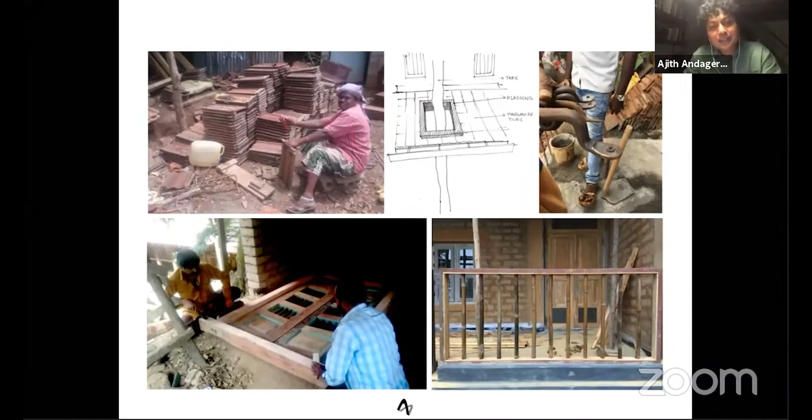That's some images of the site. It's a load-bearing structure we've created. You can see us cleaning the old Mangalore tiles, and at the bottom left, the recycled windows, and bamboo used for the railing. It's always fun for us to involve craftsmen and look at what's available locally instead of sourcing material from 500 or 1,000 kilometers away. We go with an open mind to the site, look around, and based on the client brief and local building traditions, decide how we want to build it.

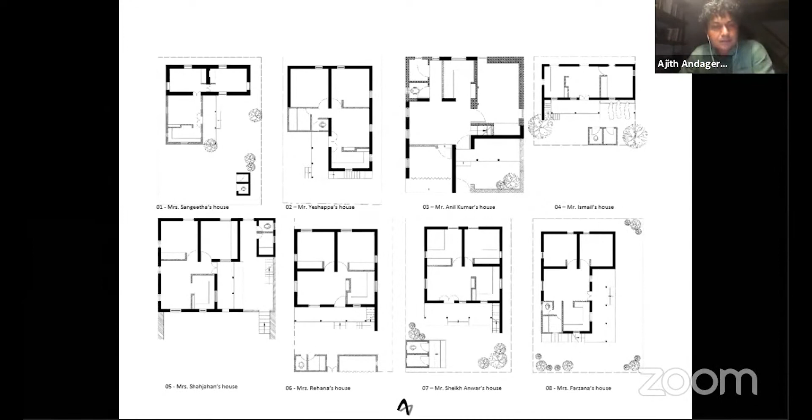Yeah, these are the beneficiaries we dealt with in that village. In our observation, some of the small spaces they built out of necessity, not any style or how it looks, they're so pretty and so minimalistic. That's our research in our practice.

This is again the previous project I mentioned in Gudalur, Tamil Nadu, where after finishing that guest house, the tribal communities came to us and said, we're getting some funds from the government to build these rural houses, can you help us? So we did 12 more houses.

We trained the entire cluster of people on how to make Adobe, how to treat bamboo. We used bamboo because they're amazing at working with it, and we used mangalore tile with a sloped roof because it's a tropical area.

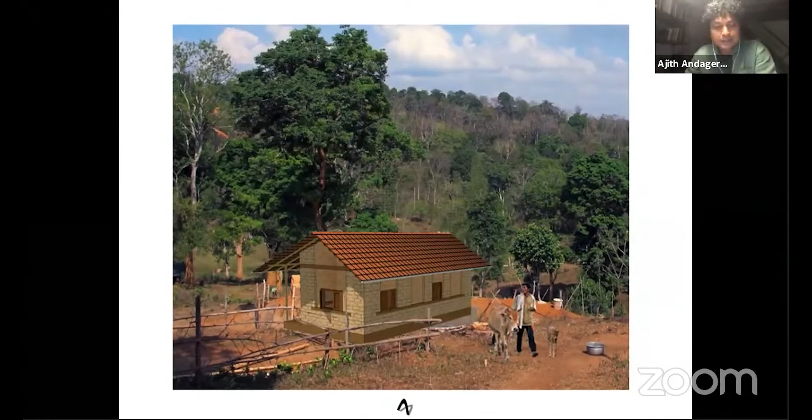So we took all that into consideration, making sure they wouldn't get into too much maintenance.

So here the major portion of the structural members are made out of Adobe walls, and the infill in between is made with wattle and daub, using treated woven bamboo, and plastered with an earth and lime mix.

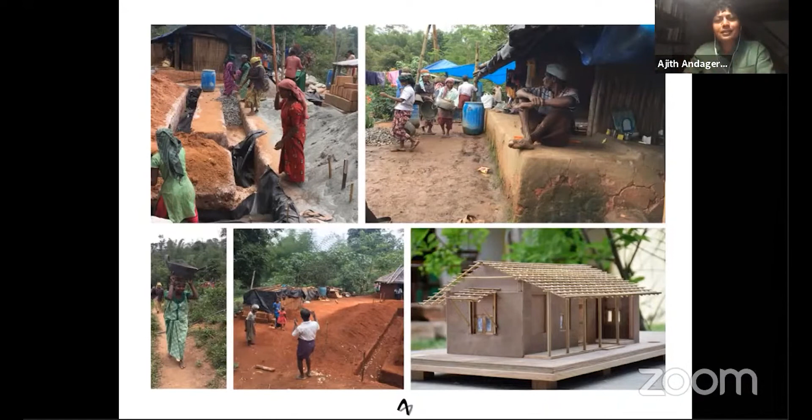We also introduced a solution for the foundation, because in monsoon, due to capillary action, water comes up and the entire flooring gets wet with moisture. So in the foundation we had to use a pond liner to arrest the moisture coming up into the building. These are the modern techniques and materials we introduced to them.

This is still now some of the projects I've shown.

In our life we travel a lot in the villages, and all our projects are inspired from village houses. It was a constant question in our mind, that we need to do something beyond just taking pictures and using it as inspiration for our buildings or projects. How many people get an opportunity to travel and document?

So that's when we started a non-for-profit organization called Samrakshan India. As the word says, Samrakshan means conservation, and so on.

So we started from Karnataka, where we documented vernacular houses, common man houses. Karnataka has 30 districts, so our idea is for each district to document 20 houses from 300 square foot to 30,000 square foot, with various selection criteria. Our idea is to share it among anybody who's interested.

Open source, people can download our materials and things like that. This is to build an awareness among designers, build an awareness among the general public, to showcase the value of these houses, what we can learn, how to go forward. So that's parallel with architecture. This is our research wing.

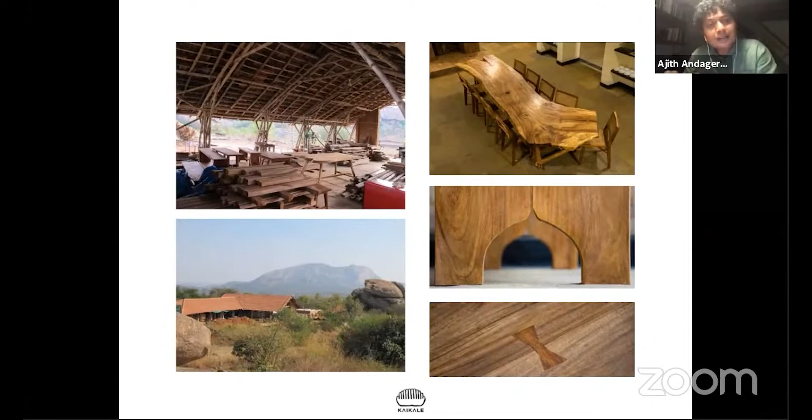It's not easy to buy treated timber off the shelf like in Indonesia, or in Europe or the West. But in India it's so hard - if you want to use Indian timber, or import it, of course you get treated timber. So we set up our own plant, and we have control and understanding of the material we're using, and things like that.

This is some of the furniture which we made - for our projects we make our own furniture, lampshades, and we also get into stitching curtains and a lot of other things. We wanted to expand our limits to doing many more things instead of buying from a shop whatever is possible. It's not mass produced, because every client comes wanting their house or building to be very unique. So we ask, whatever material or fixtures we use, how can it be made unique rather than something you'd see in a thousand other homes in the country?